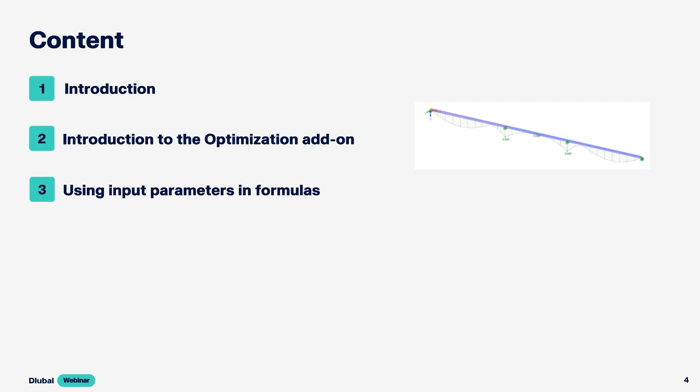Thank you, Andreas, and welcome to today's webinar. Today we want to deal with the optimization add-on, and first of all I want to show you how to activate the add-on and give you a small introduction, and after that I'm going to show you how you can use this add-on to optimize global parameters and how to use parameters in formulas and optimize them. So we are going in.

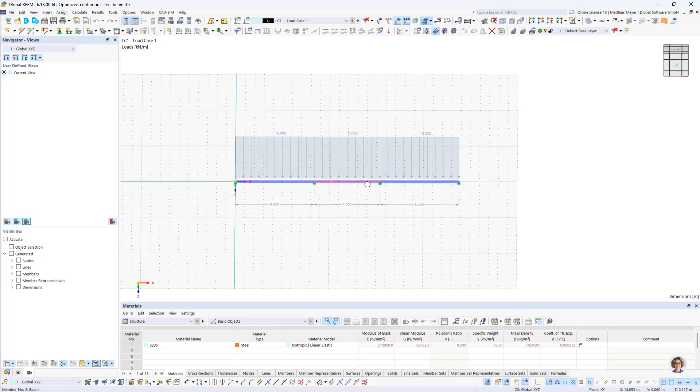First thing I want to do is optimize a continuous steel beam. It's going to look like this. We have two outer fields which have the same length and an inner field, and the length of the outer fields differs from the center field. So we have a symmetric system. And what we also have is a continuous constant load of 10 kilonewtons per meter.

We also want the self-weight activated, and we ask ourselves, okay, how long can this beam be at its maximum, which length it can span. The material is given, and also the cross-section is given. It's an IPE 240 and we have S235 steel. All right.

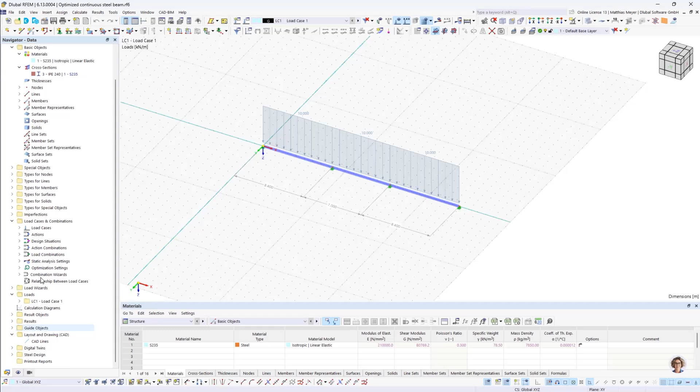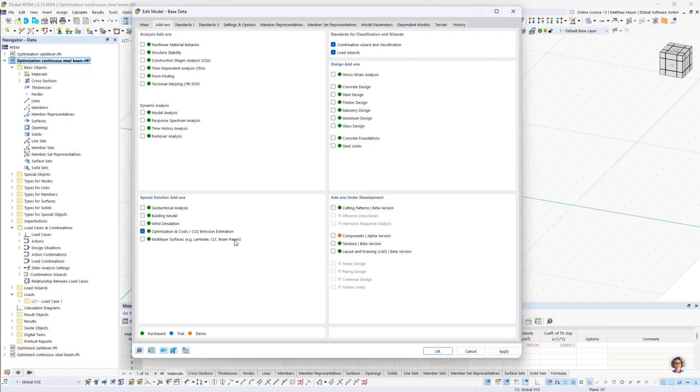So first of all, we have to activate our add-on. We're going to do this at the base data interface. So until recently, the add-on was here on the right side. Now it's on the left side. We activate this checkbox. We also want to activate steel design. And we're going to choose the recommendations of the CEN. And click OK. And the first thing we have to do is define our nodes.

The first node will be at 0, 0, 0. The second node is at 5, 0, 0. We don't know what the maximal span length is. This is just a guess, and for a start I'm guessing it's 5 meters. And so the next one is at 10 and the last one at 15.

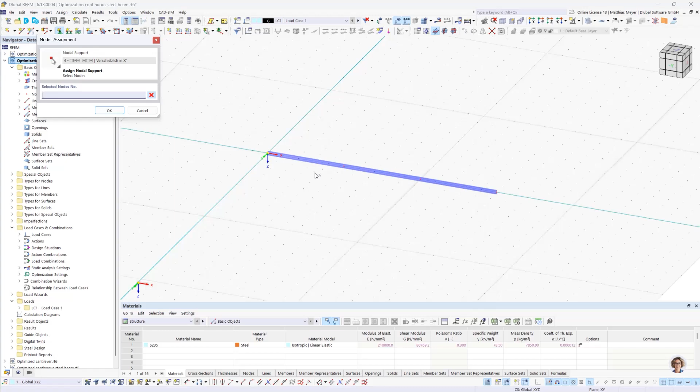All right, then we have to put our beams between the nodes like this. Then we have to add some supports. The first node will be fixed in X direction. Okay. And the other nodes are not fixed in X direction. Okay. Small check if everything is all right. It is. And then we apply some beam load.

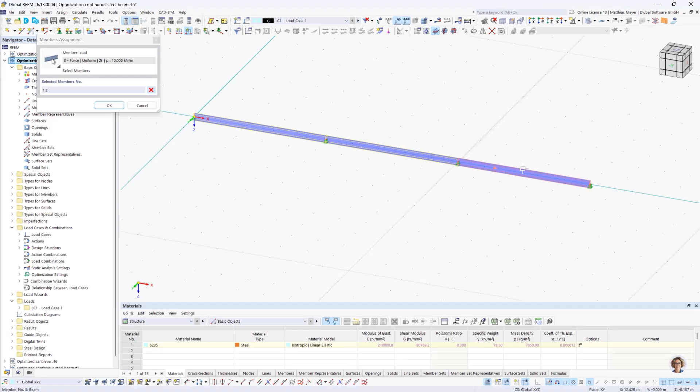Oh, this was the wrong interface. We need this one of 10 kilonewtons per meter. And like I said, the self-weight is activated. And now we don't want fixed lengths, we want them dynamic. So what we are going to do is we open the nodes table, and now we define some global parameters.

I am going to delete them. Yes. All right. So where we are going to do this, we go on global parameters like this. And then we call the length of the outer fields L outer. We can also make comments to describe our parameters. Call this length of the outer fields. And then we have a length of the inner field. And give it like the same comment.

And that's it for now. And now we have to make the coordinates of the nodes dynamic. So the first one is still fixed, but the second node should be dependent on the length of the outer fields. So we give it this parameter.

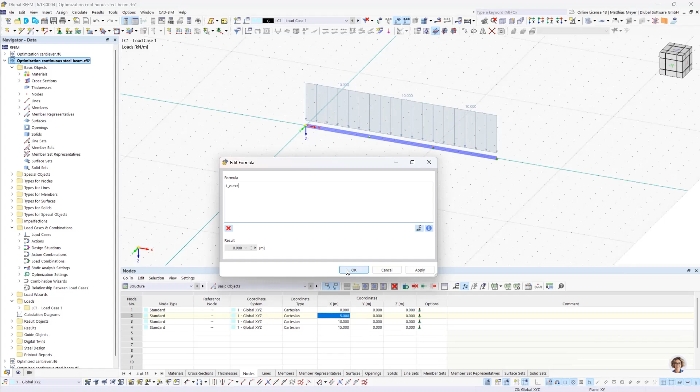We can also switch between parameter view and absolute view. And here the x coordinate of the third node has to be 1 times the outer length plus the inner length, not load, length for both.

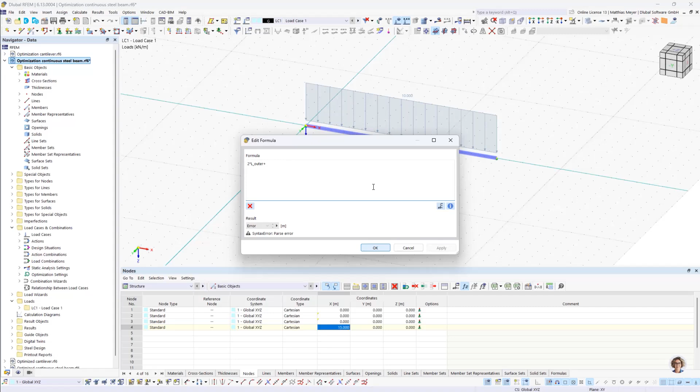Okay. And the third node has to be here: 2 times the outer length plus 1 time inner length. Here, double click. All right. So now it's all on 0. Why? Because we have to define some values in here. Like I said, we can start with 5, but we actually want to optimize this parameter.

So what we are going to do is we need a third formula for the whole length. So I call this L whole. And we define this as an optimization formula. So we define a formula, and the result of the formula we want to optimize.

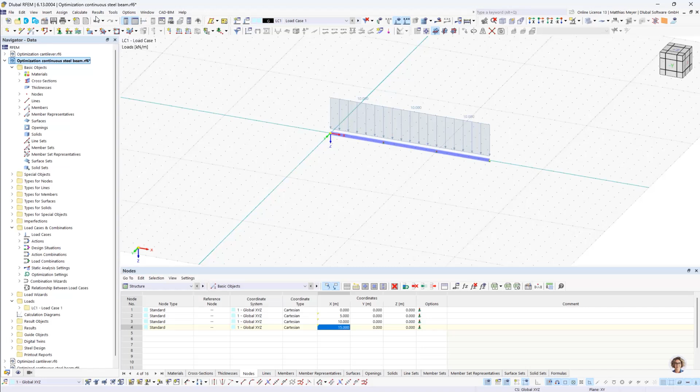Yes. So the whole length is 2 times the outer length plus the inner length. Right now it's 15 meters. And then we press OK. So our beam is back. And now we open our optimization interface here at Calculate, optimization settings.

And we want to maximize our whole length. So we choose max global parameter. This is also new, also min global parameter. So these options are for minimizing or maximizing global parameters. Here we still have a problem because the parameters we need to change to optimize the whole length are not shown here.

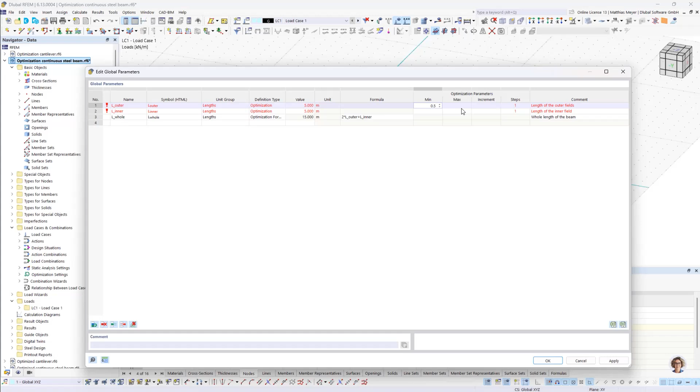Why? Because we need to define them as optimization parameters. And for this, we also have to define a minimum and maximum value of this parameter. I'm going to start with 0.5 and put it up to 10. So here you can also define the range of our parameter. If you say, okay, it shouldn't be longer than 10 or 11 or whatever, you can define this here.

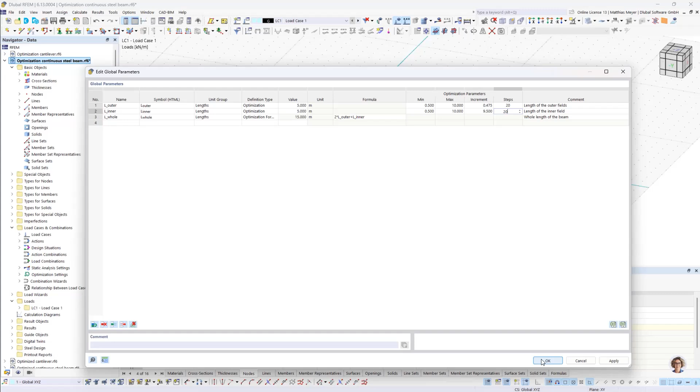And we also need to define how many steps per optimization we want to consider. I'm going to choose 20 for this example. Press OK, and now if we go back in our optimization settings, we can see our parameters here. Right now we have 441 mutations, which is 21 times 21.

So what the program is going to do is start with 0.5 for both of them, and then start increasing one of the values. And when it has done this 20 times, it will increase the second value by one step, and then use all the 20 other steps again, and so on. So this is the most simple optimization procedure you can use.

There are other possibilities, but for simplicity reasons, we want to stay with this optimizer right now. All right. Now we press OK. What we have to do first, which I forgot, is to press on activate. And when we have set this checkbox, we can also calculate this. Why is this checkbox here? It's so that you don't accidentally start optimization, because it will need a long time.

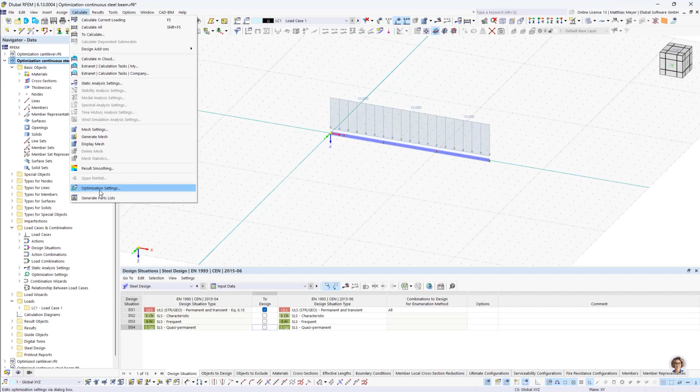So what I also want to do is only check the ultimate limit state. So first we go to steel design and deactivate the other states like this. And now I'm going to start the optimization process. And you can see that it actually needs some time per step. At one point I will cancel it, but I just want to show you how the calculation procedure is done. So like I said, it starts with 0.5, 0.5.

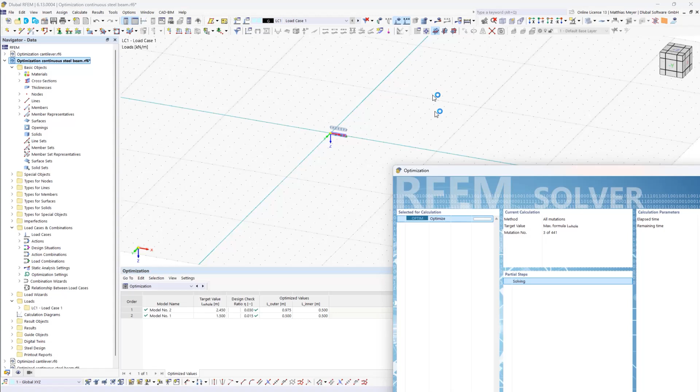It will also always adjust the model. And now it's increasing one parameter step by step. But like I said, 441 optimization procedures will take a lot of time, so I'm going to cancel this right now.

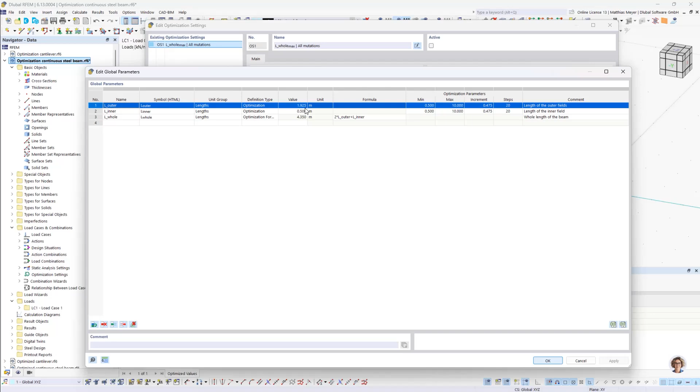Okay, and if you cancel the optimization procedure, it will take the last optimum it could find and will set all our parameters to this last optimum. So it's set to 1.925 and 0.5, and uses this also for our model.

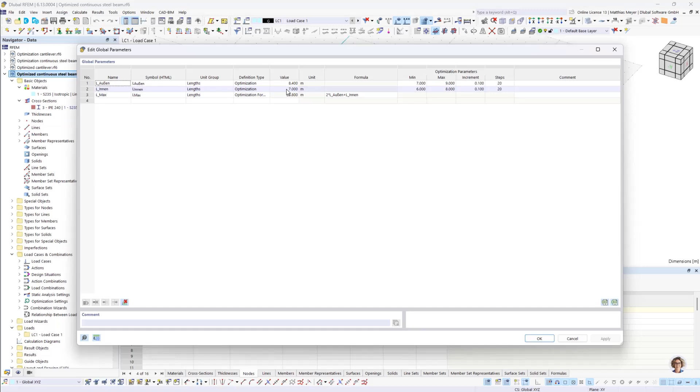Here I have the whole system optimized. You can see that our parameters are set to these optimization values, and I'm going to show you. Going to steel design. Here you can see the utilization is almost at 1.0. We could use more steps and then we would get closer to 1.0, but for now this is fine. And for our maximum length, we can use guide objects for this using dimensions.

So in this case, the optimized length would be 23.8 meters. We can also see the biggest moment would occur here over the center supports, and also the outer fields are longer than the inner field. All right, so this was for the continuous beam.

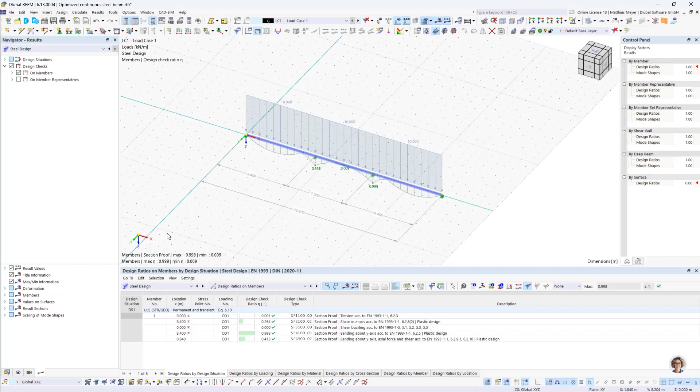And the next thing I want to show you is how we could optimize a cantilever. So we want something like this. We have a cantilever with 3 sections, and for each section we will use a different cross section.

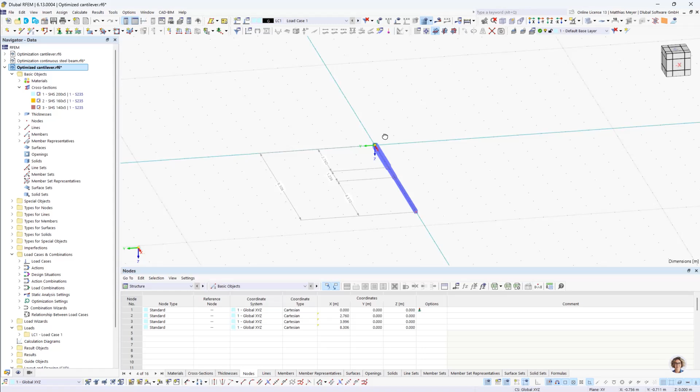Here I choose these cross sections, and you can imagine that because we have a linear increase of the moment, the biggest moment will occur here at the support. So we need the most resistance over here, and for this reason we could use a weaker cross section at the beginning of our beam, and so on. All right.

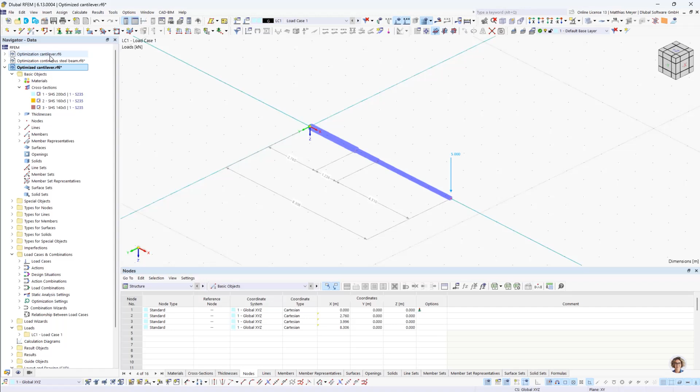So the first thing I have to do is activate our add-on again, also steel design, and I'm going to use the recommendations. All right, then I have to define my nodes, start at 0, 0, 0, and the first segment will have a length of 3 meters, next one 6 meters, 9 meters. Okay,

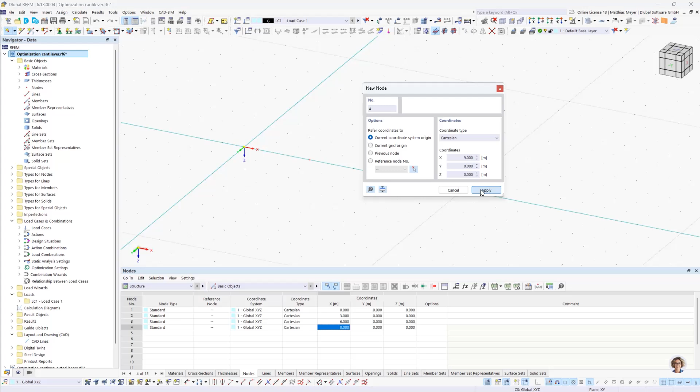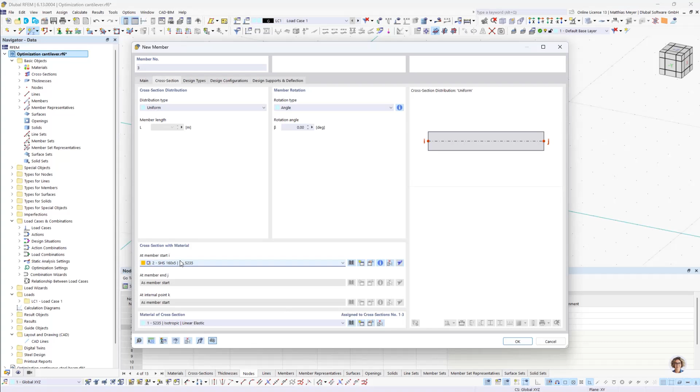then I'm going to apply our beams. Start with the strongest cross section. Then the middle strong cross section and the weakest. Like this.

Add a nodal force, okay, 5 kilonewtons, and then I also need a fixed support at the beginning of the beam, okay, like this. Also the self-load is activated,

and now I'm going to define my global parameters. I name them length 1, length 2, and so on. And length 1 is the length of beam 1, and so on.

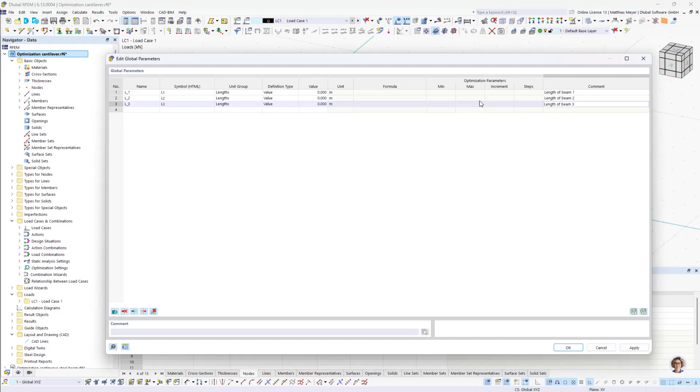Okay, I want to optimize them, so now I will change the type to optimization, and for the beginning we will stay with value, but I will change this after I applied these parameters to my nodes. So the first node is at 3 meters, which is 1 times length 1, and so on.

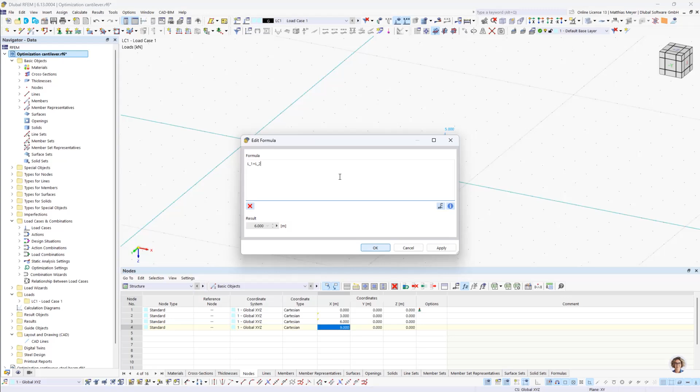All right, and the first thing we are going to do is we will conduct a steel design procedure one time, just to have an idea about how long our beams or our segments will be. And what we can see is, okay, the first segment could be a lot longer and the other ones are probably smaller. So what we are doing now is going back to global parameters.

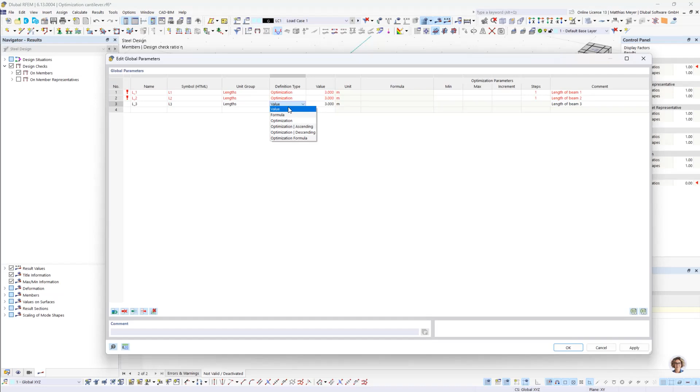We want to optimize them, so we put them on optimization, and length 3, which is the length of this segment, we are going to start with a length of 3 meters and give it a maximum of 6 meters. We'll use 5 steps. And for the middle one, I'm going to start with 0.5 to 2. I kind of know the optimized length, so that's why I'm going to choose this.

And for the last one, for length 1, we start with 2, and it's between 2 and 4. Like I said, I chose these values because I kind of know what the optimized length is. Okay, then after this,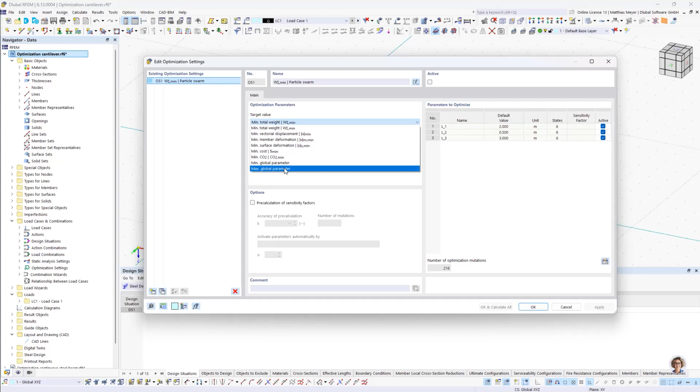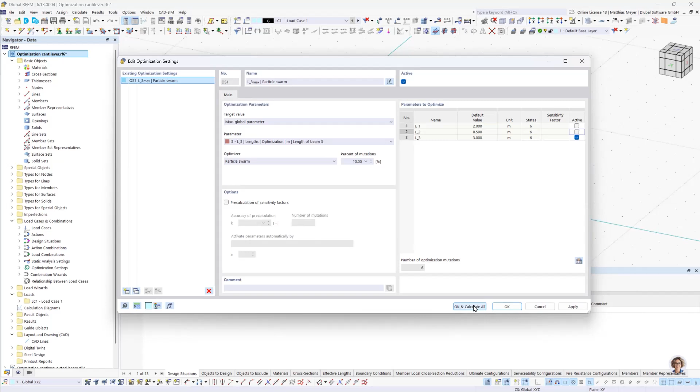we are going to open our optimization settings, and now we only want to optimize length 3, because length 3 is kind of independent of the other lengths. So we have to choose parameter length 3, deactivate the other ones, because we only want to optimize this one right now. Press on active, and then we press OK and calculate. So we have 6 mutations now.

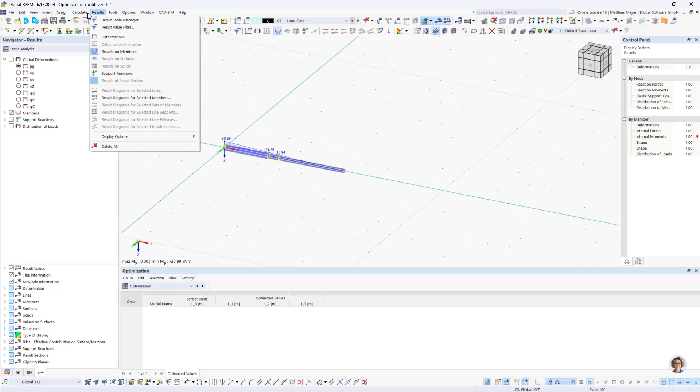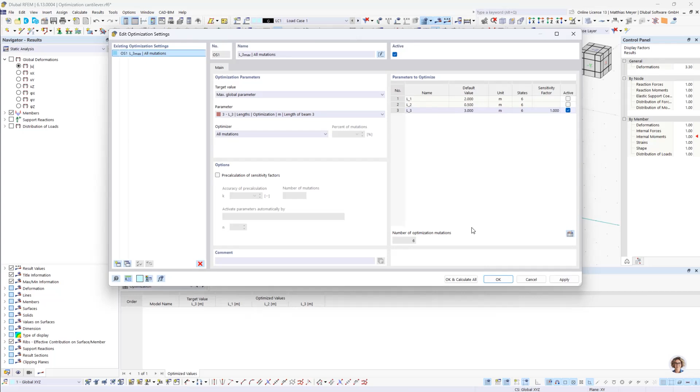You can also watch our optimization process over here. And it's basically doing nothing, right? It's not doing anything. Let's check this again. Length 3, between 3 and 6. We choose particle swarm, but I want to use all mutations. So we activate this again. And let's see if it's going to do some optimization now.

Yes, looks good. So we start with 3. We have a utilization of 0.6, now 0.8. And what we can do is, as soon as we found our optimized length, we can cancel this to save some time. So probably for the next one, the design ratio would be too high? Yes, it is. So I'm going to cancel the calculation.

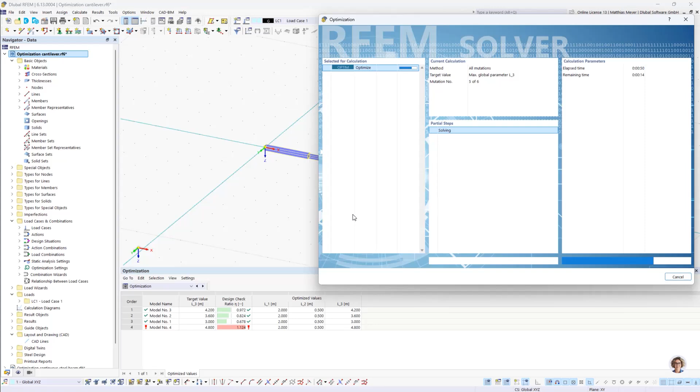All right. Now this one has a length of 4.2. You can check this by double clicking on the beam. Yes, 4.2. And what I'm going to do now is go back to optimization settings, and I want to save this value. So I'm going to change this to value, so other optimization processes can't change this value. It's kind of fixed now.

The length is fixed. I press here, and then I will continue with the length of beam 2. Choose the same settings, but go to length 2, activate it, press on active, and we're doing the same again. And now it already starts with 0.972.

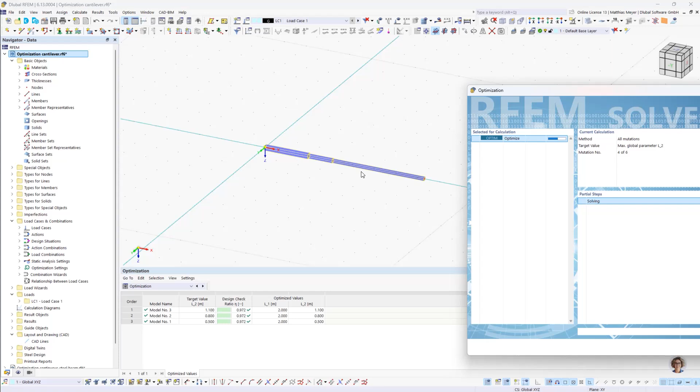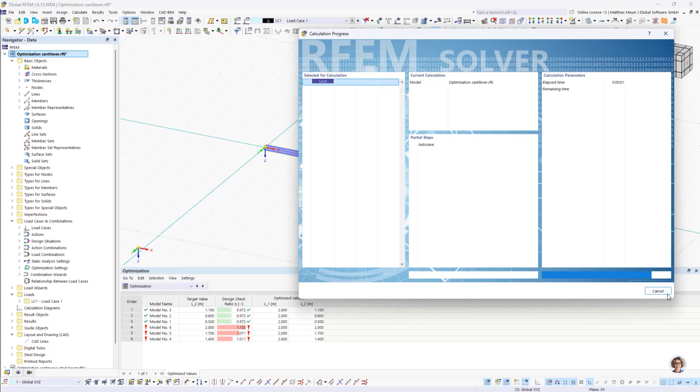All right. Why are we still here? Because it still has the optimization value, or the utilization, of the first beam. But now with 1.7, this middle beam is too long. The utilization is more than 1, so we can cancel this. And we are stuck with our optimized value of 1.1.

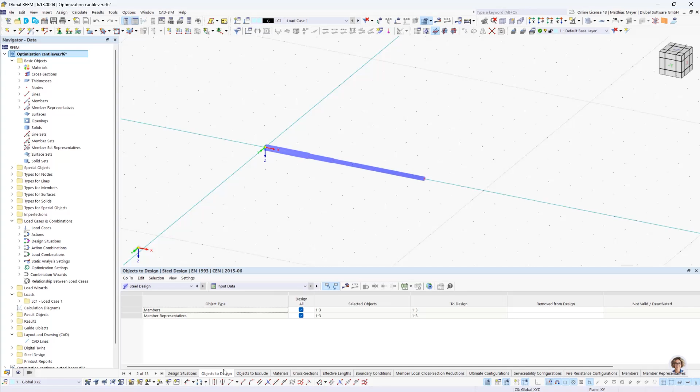We are going to change this value, the definition type, to value. Okay. And we also have to go back to this because this no longer exists. And what we can also do is say we only want to optimize beam 1 now. This can save us some calculation time.

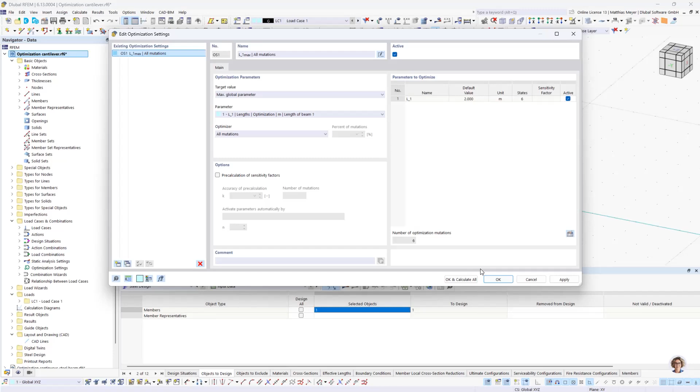And now we open the optimization settings again. We will optimize length 1. Now we have to activate, press OK, calculate all. And now only beam 1 will be designed, which, like I said, will save us some calculation time.

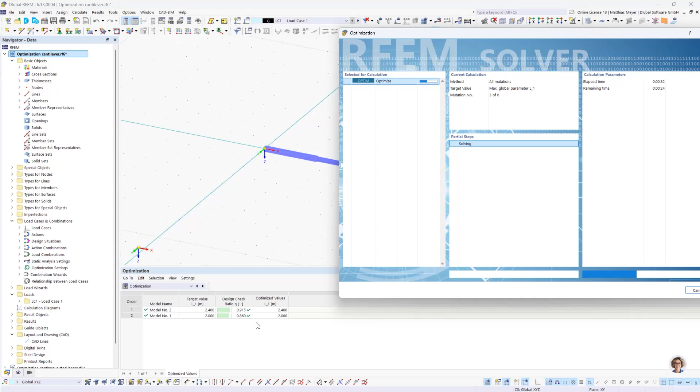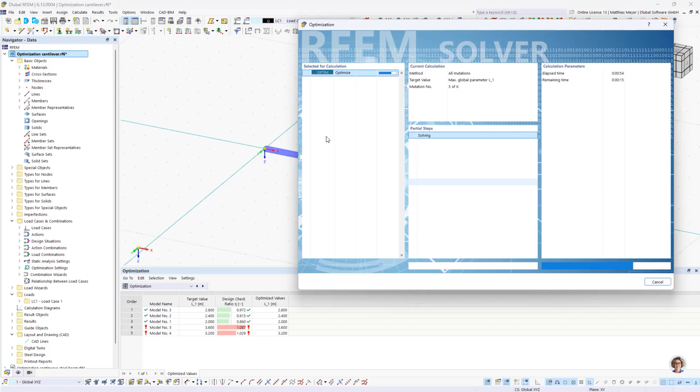So we start with 2 meters, and then it will be increased to 2.4. Maybe it will do one more. Yes, and probably the next one will lead to a failure. All right, so we cancel. Okay. Now we have our optimized cantilever.

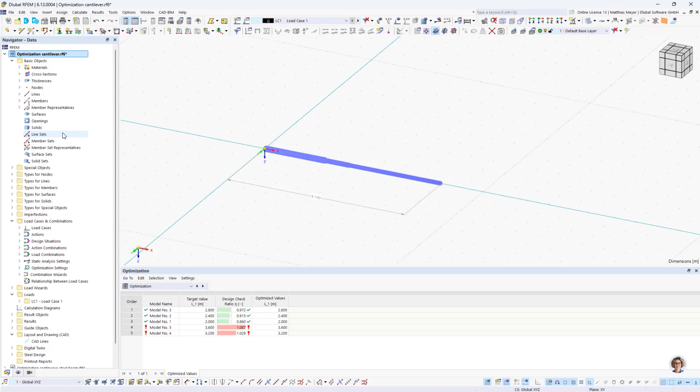We can add some dimensions. All right. And here we have a length of 8.1. Now I only used 6 steps, which is actually not that much. If we have a look in our steel design calculations and at the utilization of all beams, we'll see that there's still room for longer beams.

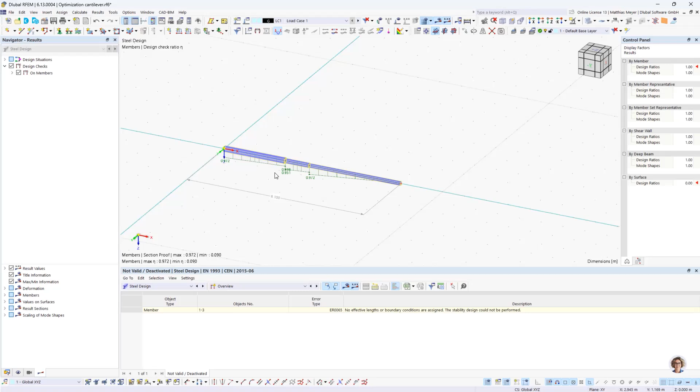But in this example, I used 100 steps. And we can see the utilization is more or less 1.0, and we have a length of 8.3.